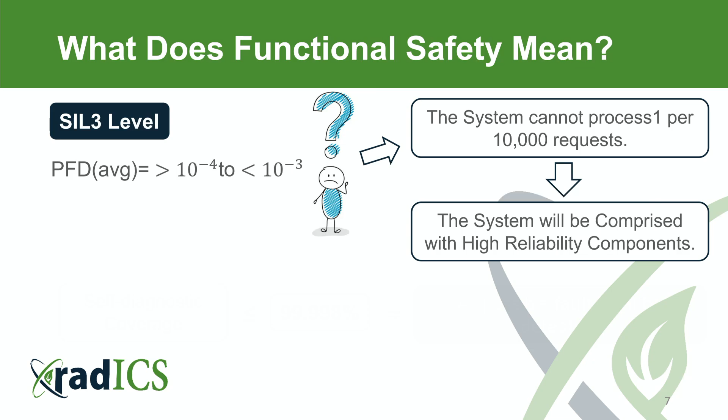For the system, it means that the system should include only reliable components, and the system shall have self-diagnostic coverage better than 99.8%. Such a type of system will allow you to detect all possible faults. And in case when a critical fault has occurred, it happens sometimes, the system will go to the safe state and no damages will occur.

Let's consider some examples from real life. What is reliability? It's a 30-year marriage. What is a safe state? Safe state, for example, the kettle: no water, the kettle is switched off.

When we talk about self-diagnostic, let's consider the situation with a car. All of you are drivers or passengers in a car, and many cars have a type of sensor named tire pressure monitoring system. Of course, the car will work without it, and it will be a really good car.

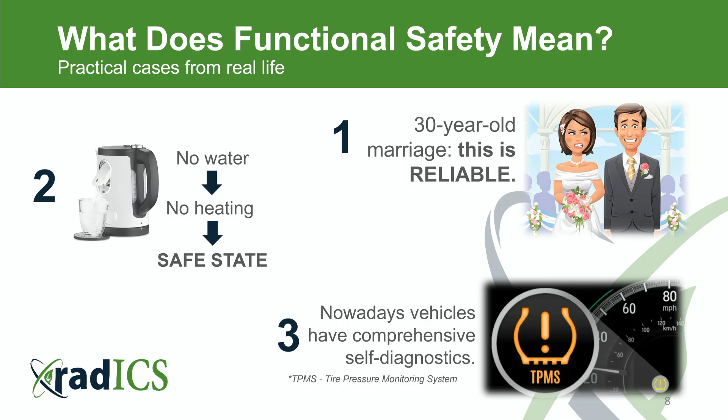However, what do you prefer? To see such a difference and find the nearest pit stop at the start of your trip, or stop the car in the middle of a highway because of a flat tire?

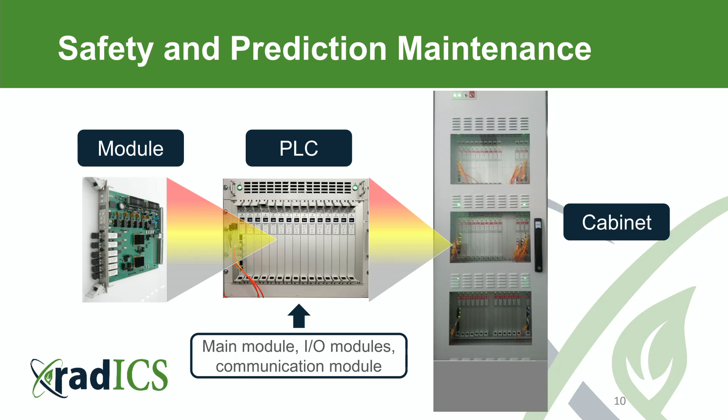So we discussed safety and self-diagnostic, but safety, self-diagnostic, and maintenance are also connected together. When we talk about I&C, I&C includes cabinets. Cabinets include a programmable logical controller, or chassis. PLC includes different types of modules which receive, process, and send information to other systems, or control different types of processes at a nuclear power plant.

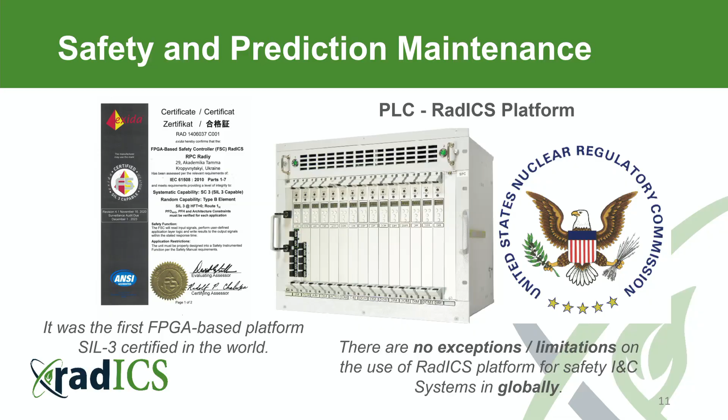When we talk about our I&C system, it's based on the RadICS platform. RadICS platform has a safety level like SIL 3, in one channel. It is an FPGA-based platform, and it is a platform which has the acceptance of US NRC to use in safety I&C systems in the nuclear market in the US.

This platform has self-diagnostics at different levels. The first level is the system level. The second one is the cabinet level. And the third is each particular module.

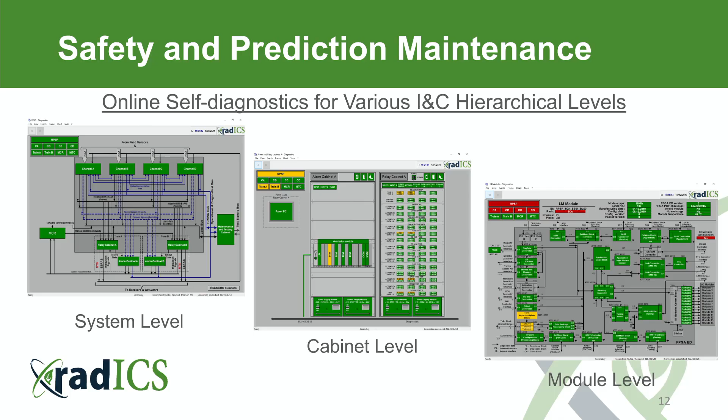I would like to show you some practical cases related to this. This is our baby, this is our platform. So, the first case...

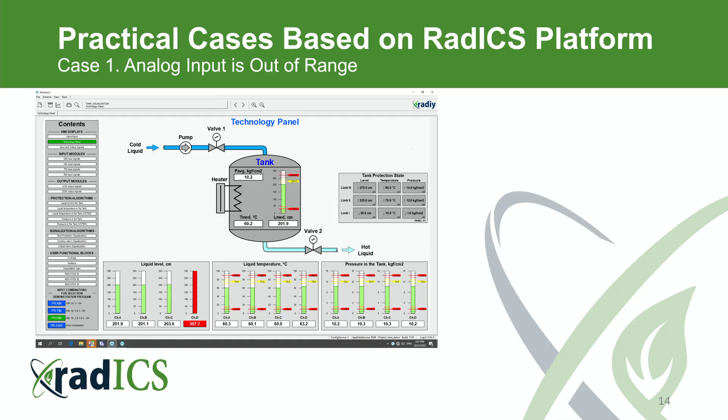Let's imagine that one of the sensors in the tank is out of range. It means that our system shall react to it. There will be such a reaction at the system level. You can see it on the screen, and on this screen too. Also, we can see it at the module level. Give me a second, please.

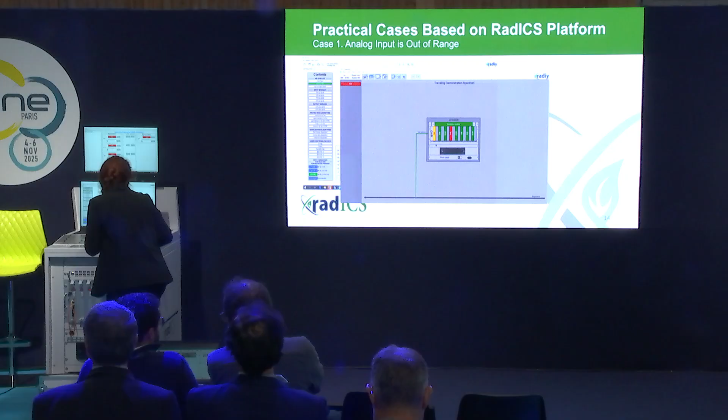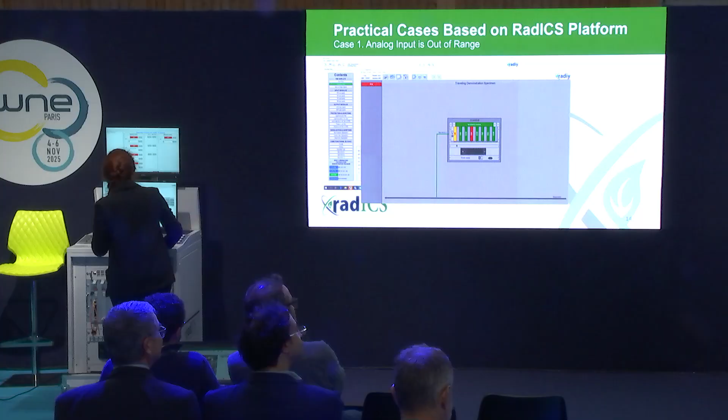Alexander, where are you? Please help me, where is the mouse? I forgot it, what's wrong with the mouse?

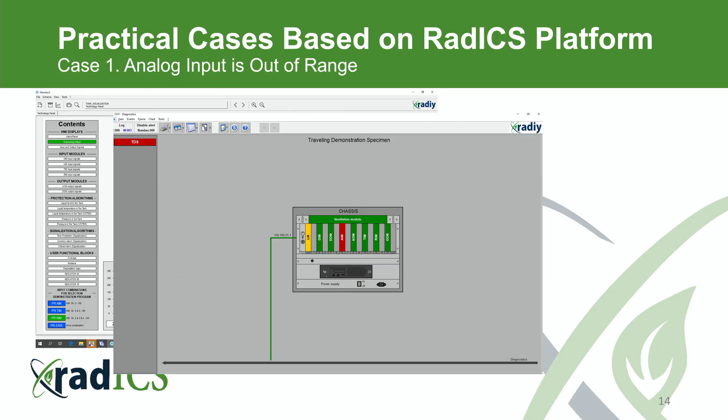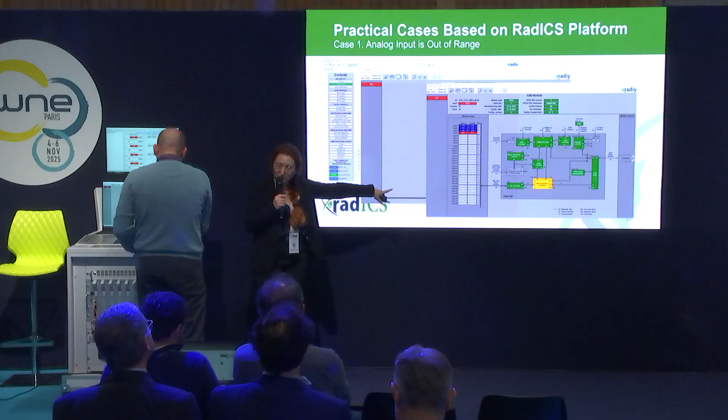Okay, let's consider it on the system level. We will show you a little bit later. And of course, when we open the module, we can see it even on the module level. What exactly? Up. Let's go, everything.

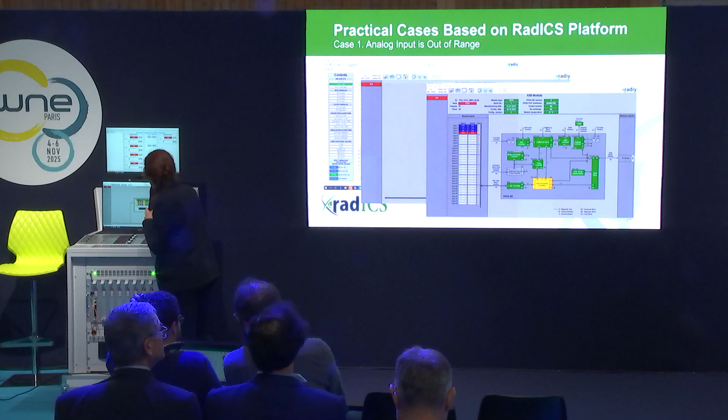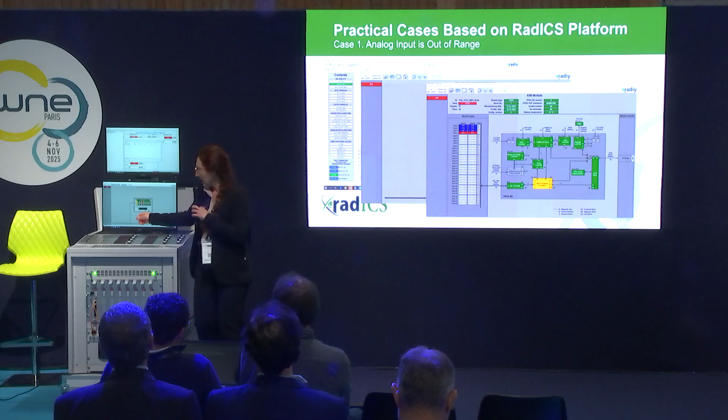So everything is okay, it was not the safety system, it was just a mouse for the computer. So we can see this type of picture when we open, for example, the analog input module. We could see what exactly went wrong, that this type of signal was out of range. So let's return it back to the normal parameter.

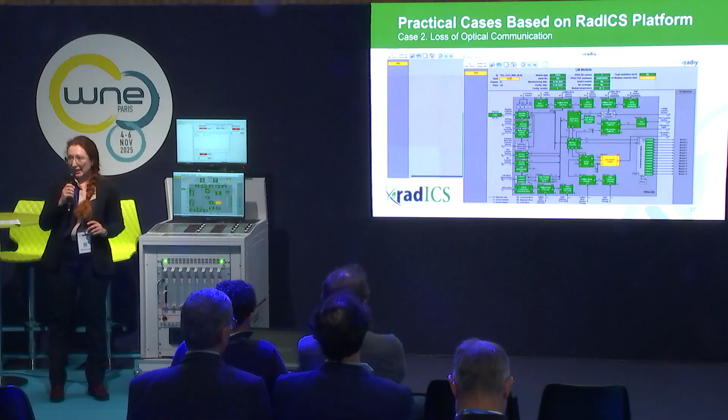And everything is okay. The second case, for example, is when there is loss of communication. If we lose one of the optical connections, we can see the alert on the logic module. It is not a critical fault, because we can see just an alert, not a fault. And when we open the logic module, we can also see what exactly went wrong.

Let's return it back, and the system goes to normal operation. And the last case - let's imagine that one of the modules was damaged. What we will see is the system should also detect it. We can see that the logic module is red, the analog input module which was damaged is also red, and this is a critical fault, meaning the system shall go to the safe state.

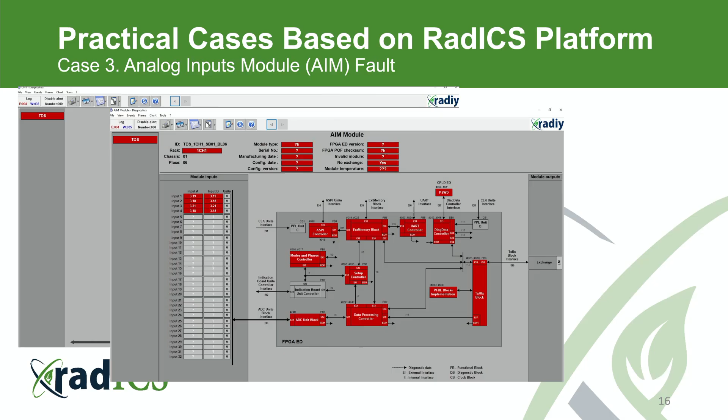When we open the analog input module, we can see that everything is red, it is broken. And when we open one of the output modules, we can see what happened exactly.

So we discussed maintenance, safety, and self-diagnostic. But where is the investment in this chain? You know that all equipment at a nuclear NPP shall be tested regularly. The type of tests and the quantity of such tests depends on the type of reactor, depends on the equipment, depends on the regulatory policy in that particular country, depends on the work instructions at that NPP, etc. However, there are some common types of testing used in each NPP.

The first one is the daily check. Let's consider the situation where we have an analog safety I&C system, for example a reactor trip system. It means that for this type of system, we shall perform the testing - daily check - every day, during 2-3 hours. We need 1-2 staff for this testing, and we shall perform this test for each channel in the nuclear power plant, and the quantity of channels depends on the system architecture.

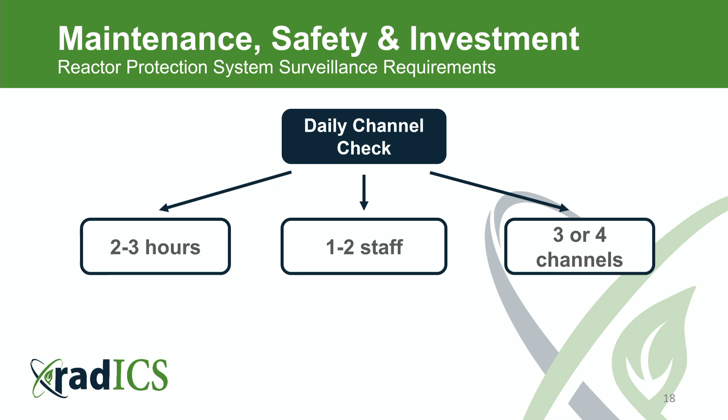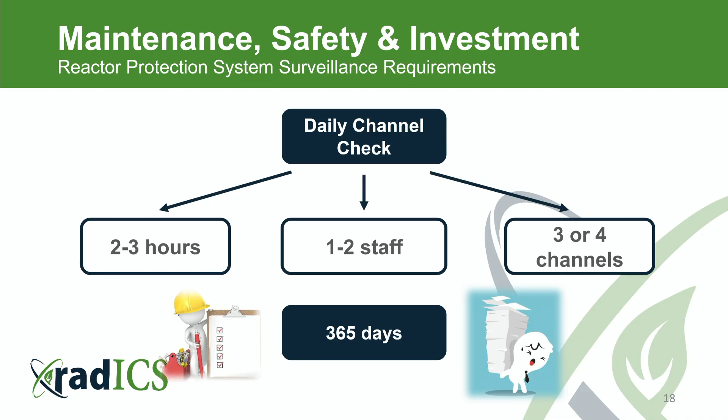And it means that these 2 people, every 365 days, should fill out a lot of paper - not just perform the work, they also should prepare many papers. Another very common type of testing for all nuclear power plants is quarterly testing. This type of testing takes on average 8 to 10 hours. It takes 3-5 staff to perform this type of test for all channels, and the quantity of such functional tests is from 15 to 35 tests. And of course, these people should fill out a lot of paper.

Let's consider how we can translate it into hours and money. For the daily check, it will be 2 hours, 2 people, 4 channels, 365 days, and it will be almost 6,000 hours. For the quarterly check, it will be more than 10,000 hours. Let's consider $100 as the payment cost for 1 hour. It will be $1,600,000 per year.

But if you use the safety I&C system for more than 15 years, it will be more than $24 million. You can tell me that it's not so big money for safety. However, what if you have a system with comprehensive self-diagnostic? The daily check could be reduced to half an hour. The quarterly check could be reduced to 2-3 hours, and you need just 2 people to perform this type of testing. And of course, these people just work with the diagnostic computer, and all results of the tests will be saved automatically.

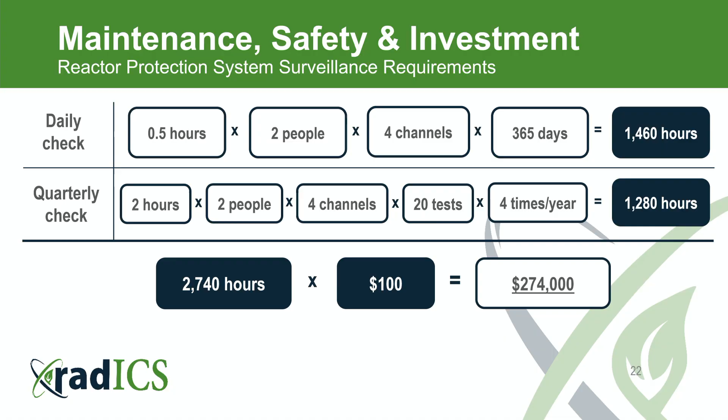Let's translate it into hours and money. It will be 1,400 hours for the daily check. For the quarterly check, it will be just a little bit more than 1,000 hours. When we translate it to money, we can see that it will cost just $274,000. For 15 years, it will be something like $4 million.

The difference is amazing. You can see that time will be reduced by 5 times, and in money, the difference will be more than $22 million for 15 years. I understand that $20 million for 15 years for nuclear is not so big money. However, if you have 20 million, better give it to me - I know how to spend it.